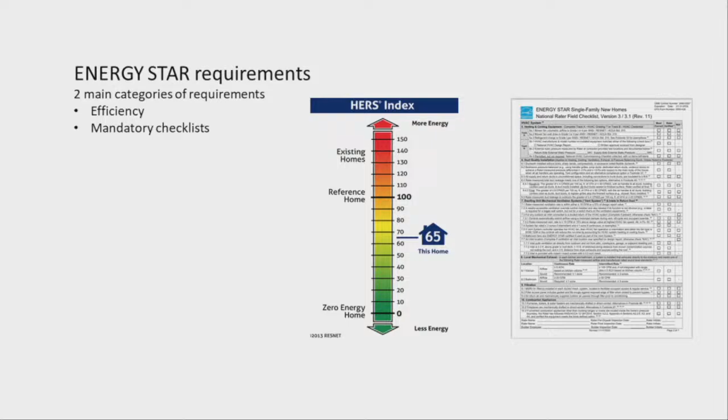The other side represents the overall efficiency of the home, and I coined a term. It's copyrighted. I own it, so don't say it. These are called trade-offable. Okay, so I don't want you using my word. And what that means is Energy Star is less concerned specifically about how you reach the level of efficiency, and just concerned that you get there. Now, certainly there are better and worse ways of achieving a high level of efficiency in a home.

Sometimes I use a stupid example of you could put R70 walls in and an 80% furnace, and maybe that would get you there. It'd be a really dumb way to do it. It might work. I've never tried to model it because it would be really dumb. But that's an extreme example of some flexibility. And actually, yeah, I don't know why you'd try it. It might work. Okay.

I think we've actually kind of already covered this slide. Well, let me say a little bit about it, though. From the outset, Energy Star was designed to be about 15% more efficient than your current code. And that's why there were different versions of it in different states. There are some states, California, Oregon, Washington, Massachusetts, they've always been really progressive in their codes. And so sometimes they get their own special version of Energy Star that's beyond what the rest of the country gets just because their energy codes are so progressive. But by and large, it's designed to be about 15% more efficient.

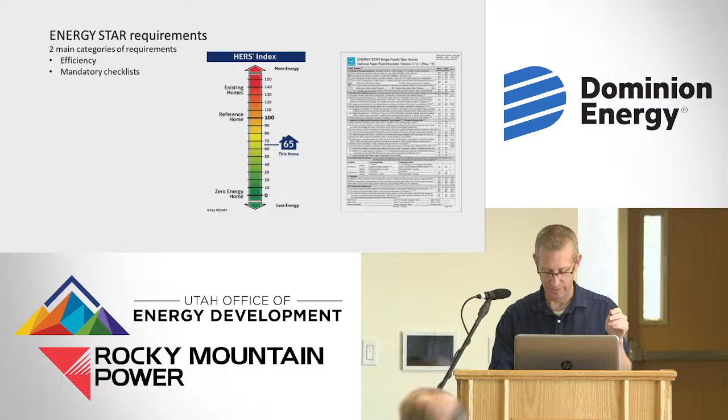Your worst built home's probably in the 70s, 80s. Your best built home is probably in your 40s. 30s is really hard to get. Probably in your 40s is kind of the reasonable range these days. My house is special. It's above 100. Yeah, my house was built in the 1880s, so we're going to give it some slack. But anyway, there are homes out there that go above 100, right here.

Okay, so the lists that come from EPA give you a reference home, and if you build a home to that level, or at least model it to that level, it should return a HERS score that is in the range for being compliant to Energy Star. Okay, Chris, how's this looking? You're making a face. Did I get something wrong? No. Is this the reference for 3.2? Yes, reference for 3.2. Okay.

R60 in the attic, 20 plus 5. What that means is that in your wall, you have R20 between the studs, called cavity insulation, and that plus 5 means that you've put R5 of additional insulation on top of the studs, typically called continuous insulation, and usually that happens these days in this state with rigid foam, those 4x8 sheets of pink or blue foam. So if you see one number plus another number, it's your cavity plus continuous.

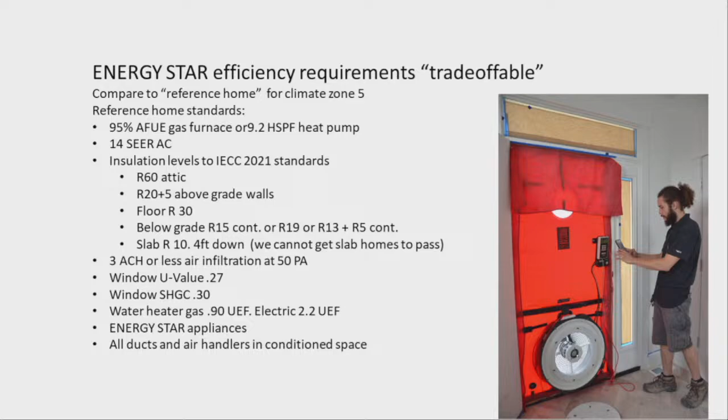If you can cost effectively find things that exceed these values, do it, because as Steve mentioned, some of his stuff is passing just barely. If you can pad your stats a little bit for a reasonable cost, it's always good to have some headroom, so that when it comes down to the final thing, you're not finding out that, oops, I missed it by 1 point. You don't want to do that, because at the efficiency levels we're talking about, even 1 point can be tough to come by.

So the solar heat gain is 0.30. The way I think about this, maybe it's to help me better understand it or to help me better teach it: I think of the window U value as the window's ability to insulate in the wintertime, and the solar heat gain coefficient is the window's ability to insulate in the summertime. It's not quite that simple, but it helps me wrap my head around it, and sometimes people don't always want the science behind it.

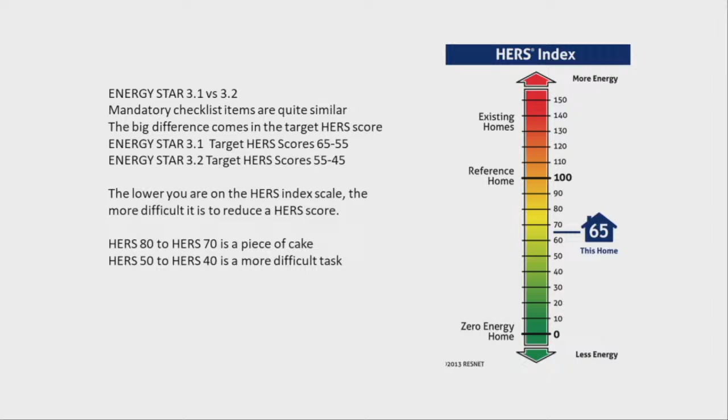And certainly curious what other HERS raters in the room have to say. I just kind of spitballed this. The HERS score needed to achieve Energy Star differs a little bit home to home. It's unique to that home. That's why I keep saying target HERS score. For version 3.1, it's kind of been in the 65 to 55 range. Again, lower is more efficient. Think golf, lower's better. Version 3.2, it dropped about 10, 55 to 45.

And as I've mentioned, it's not linear. Going from 80 to 70, piece of cake. That's taking out your 80% furnace and putting in a 95. You just did it. But going from 50 to 40, if you're at 50, you've already got your 95 furnace and your tankless hot water heater and your upgraded walls. The low-hanging fruit is gone, and now it gets really difficult and expensive.

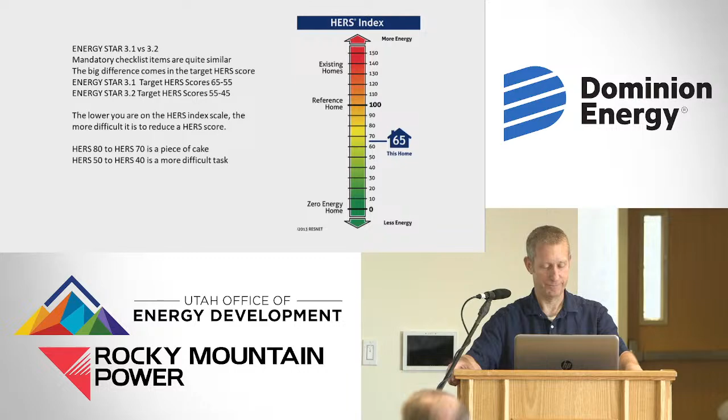So do you guys agree with that? 65 to 55 and then 55 to 45, has that been pretty good? Yeah. So that's about where we're at. Any questions on that?

Back on the SEER rating, is that SEER 1 or SEER 2? Oh, that's a great question. I think it's SEER 1, actually. So Ryan just asked if it's SEER 1 or SEER 2. Ryan is an HVAC contractor, and SEER is seasonal energy efficiency ratio. It is the number that measures how energy efficient an air conditioning system is.

And just to keep things complicated, as long as I've been in this business, there's just been SEER for residential AC as the efficiency metric. And a new one has been introduced. I don't know, was it the federal government, EPA, or DOE? DOE introduced a new one. It's just called SEER 2. And I'm sure they had their reasoning for it. In fact, Ryan, do you want to tell us about SEER 2 real quick?

SEER 1 versus SEER 2 basically is SEER versus SEER 2. Basically, SEER is a laboratory rating. SEER 2 is more real world. Your static pressure is higher. Your ratings are a little bit different, but if you tried to get the old SEER rating actually on a project, you'd never accomplish it.

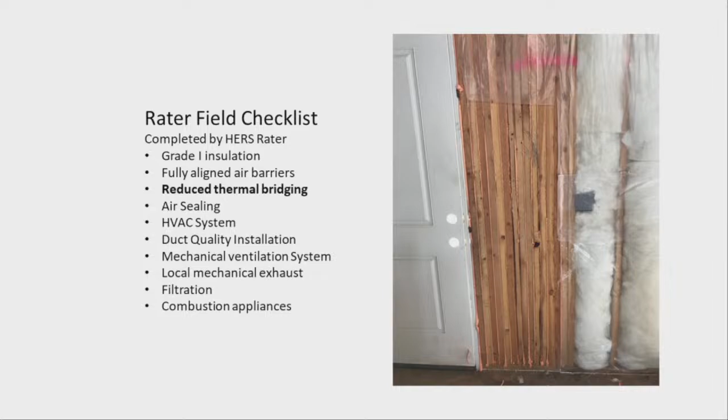Something about our framers seem to think that lumber is free. Mind you, this is a 2-story building. If this was 6 stories, I might get it, but this is 2-story. And that's a perfect example of the opposite of what we're talking about, because what we're talking about is using just the fewest number of studs that is legal and possible.

And typically, if you've got engineers' requirements saying you need to use this much lumber for the structural integrity of the home in a certain place, Energy Star is going to respect that. We're not asking you to. Well, obviously you wouldn't be able to anyway. But if an engineer says that's how many studs you need, fine, that's how many you get to use. But oftentimes it's the framers who are making those decisions and not

the engineers. Now, I've said a good way to reduce excessive framing is to take away people's pneumatic nailers, and they're only going to get the studs that you actually need in there. But you also wouldn't be able to hire a framing crew. So that's the HERS Rater.

I'm trying to decide if we keep going or if we just break. Yeah, what do you think? 12? Let's break. It's noon. Who's hungry? Yeah, I've always said you never want to be the person that's standing between anyone and their lunch. Yeah, but we listen a lot better after. Hopefully there's a lot of turkey there, so everyone's going to be top game after lunch. All right.

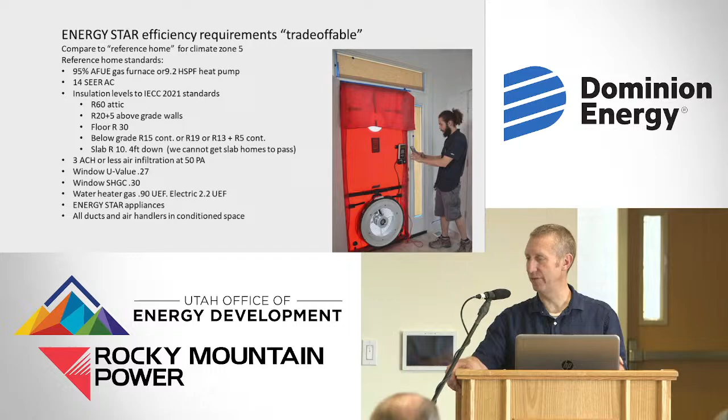One thing I just wanted to touch base on. Here we go. The water heater. I wrote water heater gas, 0.9 UEF, electric 2.2 UEF. And one thing that I've seen a little too often with water heaters specifically is people will switch from gas to electric water heaters as a step to make their building more efficient. It certainly can do that, but it can also go the other direction real fast.

So with gas water heaters, there is a variety of efficiencies that you can get. You can get the standard federal minimum efficiency gas water heater that's got B vent, which is a double wall metal venting that goes out the top and has to go out the roof. It has to be vented vertically. You can step up in efficiency from that and get them that have PVC pipe that is power vented out, and that can be vented out horizontally. That's more efficient because the exhaust gas coming out is cool enough that it doesn't melt the PVC.

Those are sometimes called a one-pipe water heater. At least that's what I've called them. It's got one piece of PVC. It's still drawing the combustion air from the room that it's in. And then you go to a two-pipe where it's bringing in the combustion air from the outside through a piece of PVC and venting out the exhaust air through another piece of PVC. And those both still have tanks. And then typically the most efficient gas is the tankless. So there's a scale, there's a variety.

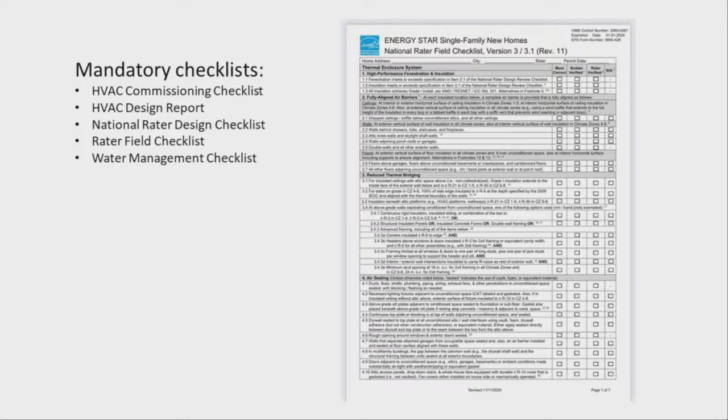It's just expensive. Every home visit costs money. And so the builder is allowed to complete that one themselves. It's a really important checklist, though. I mean, what's the number one cause of failures in homes? Water. Most of the time it's bulk water too. We'll talk about ventilation and vapor and condensation, and that can certainly be problematic, but typically it's bulk water intrusion.

So just because the builder is allowed to fill it out does not mean that the flashings don't need to be done correctly and things like that. I was so neurotic. We actually put pavers in around our chicken coop last year, and I was telling my wife, okay, we've got to be sloping away from the coop, at least a quarter inch per foot, just to make sure we don't have any problems with our chicken coop foundation. So it's important everywhere. Always direct water away from the building, and the builder can take care of that one.

Okay, HVAC design report. So from a 30,000 foot point of view, what Energy Star is asking you to do with regards to HVAC, if we wanted to break it down to its simplest terms, is do it right. But to give a little more detail, design your system with accurate information based on the home plans, and then you're going to derive your loads. It's called a Manual J, and garbage in, garbage out. It's only as good as the information you put into it.

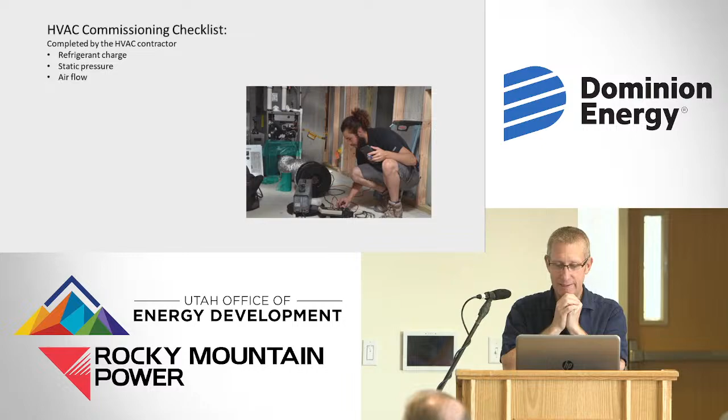Performing a duct leakage test, and we even had him break out, you can see down there in the corner in front of the duct blaster, our theatrical smoke machine. The theatrical smoke actually kind of gums up your equipment a little bit, so you only use that when you really need to. And typically, you only smoke your systems when you're doing show and tell with people. Sometimes it's a recalcitrant HVAC contractor who believes their duct system actually doesn't leak, and you have to show them with smoke.

But what we do is we cover up the registers, and then that black thing is a fan, and we call it the Jiffy Pop tube. We pressurize the duct system to 25 pascals. I think people sometimes think when we're doing a duct test that it's a ridiculous amount of pressure that we're putting in there to induce the leakage. It's really not. The fan's just noisy, so it seems like it. That's 1/10 of an inch of water column, isn't it?

25? Yeah. So, HVAC systems, do you ever get up to an inch of water column, Ryan? No, not in residential. What, half inch though? Ductwork, yeah, no more than half inch. And normally only 0.55 is about max, residentially. So the amount of pressure that we are inducing for this test is actually pressures that are experienced in duct systems during operation. I've been criticized saying it's not fair to tell me my duct system leaks when you're squeezing it so hard. I'm like, actually we're not. We're just making a lot of noise while we squeeze it a little bit.

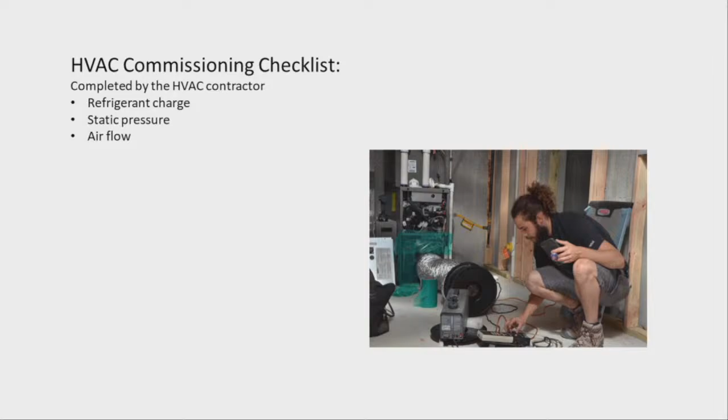The gentleman in the photo's name is Cyrus. I'm sure he's just posing, trying to look really deliberate while he's doing it. But that's a little pressure gauge. It's called a manometer, but it's basically a pressure gauge and kind of a little handheld computer. And so we're measuring the pressure inside the duct system and the pressure outside the duct system. And then that fan is also communicating with the little handheld computer, so that we know how much air is moving through the fan.

And so we just adjust the fan until the pressure inside the duct system is a steady 25 pascals, or about 1/10 of an inch of water column, higher than the pressure outside of the duct system. And then we just look at how much air it takes to maintain that constant pressure differential, and that's how we know how much air is leaking out of that duct system at that pressure.

And this is one of the tests that HERS raters will perform. It is actually part of Utah code to test duct systems if at least part, and definitely if all of that duct system is outside of conditioned space. And typically in Utah, that means if you've got ducts in an attic. If you have a system in an attic, then that automatically means that duct system needs to be tested for code as well.

And what we do is we calculate how many square feet of floor space that system is serving. So it's easy if there's only one system in the house. It's the square footage of the home. And then you're allowed a certain amount of cubic feet per minute per 100 square feet of conditioned floor area. We say percent, but it's not really percent. And it depends on how many returns there are in the system. But that is how a duct leakage test happens.

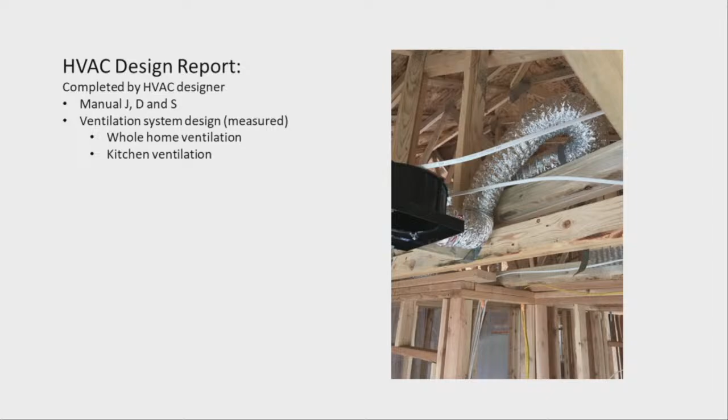So a little quick lesson. Our HVAC guys live and die by this stuff. But there is something called static pressure in a duct, and there's friction when air is moving through a duct, and that friction will cause pressure to build up in it. Sometimes it's nominal, sometimes it's significant, and flexible duct has higher static pressure because it's rough and it's harder for the air to get through it.

And as you could guess, it's harder for air to go around corners than it is to go in a straight line. And so because of that, to help HVAC designers understand how best to design a system, there's something called equivalent length. And so a 90-degree corner, even if it's kind of rounded off, has the same static pressure or equivalent length as like 20 feet of straight duct. So corners really hurt things.

The worst case I've seen is a 90-degree bend or even a T-bend that comes up out of a furnace and then splits off two ways. That might have 120 feet of equivalent length. It's really hard to have a system that works well. And so what happens in those situations is the airflow just goes down and down and down. So this fan is probably a 100 CFM fan, as rated by the manufacturer.

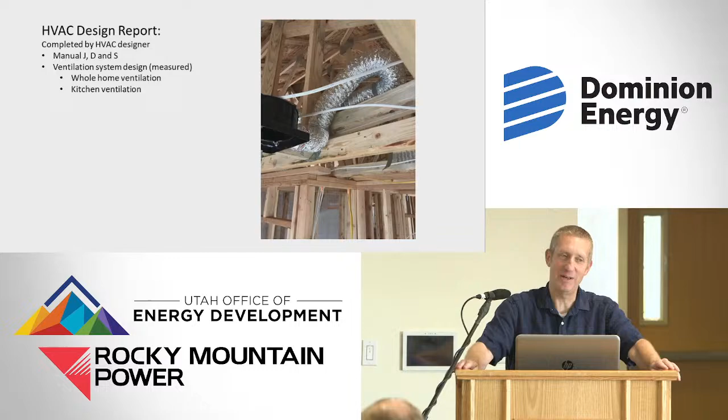Unfortunately, that 100 CFM fan, I didn't test it. I was doing something else there. It's probably moving 20 or 30 CFM, would be my guess. Maybe. Does that pass code? Well, actually, it doesn't depend on the city. We have a state code in Utah. Code now says it doesn't. Flex duct, 4-inch flex can only be used for 5 feet maximum, so it almost has to always be solid pipe. Oh, good. I think this was 6-inch, but I could be wrong.

But whether it passes code or not, to me the big problem is, is this bathroom going to have moisture problems, especially in the wintertime? We're going to get condensation in there. Yeah. Will there be mold, mildew, moisture problems because of that, Steve? And with all that static pressure, it's also really noisy, and they'll never turn it on. Yeah.

So let's talk about ventilation and Energy Star. There are 2 different categories of ventilation that are required for Energy Star. One of them is whole home ventilation, and the other one is kitchen ventilation.

I have spent ridiculous amounts of time trying to explain this to people. And I think I ended up confusing them more than anything else. Am I the only one that does that? Chris just chuckled, so maybe I'm not the only one. Okay.

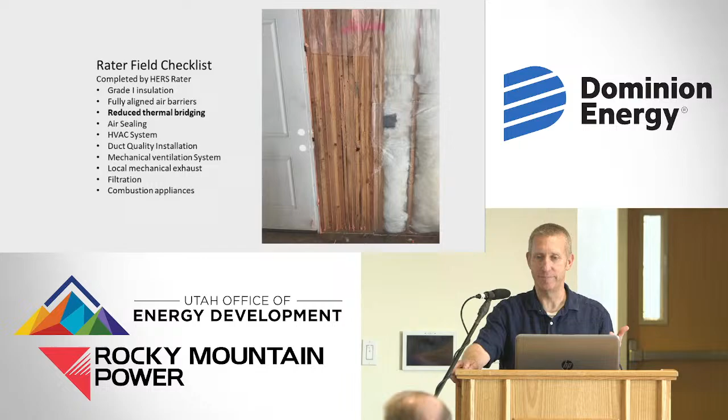And by terrible, think of an oddly shaped stud cavity, whether it's got J boxes in it or it's not the nominal width. And rather than cutting the batt to fit, they just shove it in. And when you do that, in some places it's going to be compacted too much. Other places there's going to be nothing there. The way that's usually referred to in HERS Rater world is gaps, voids, and compressions. And all of those things reduce the functional R value of an install.

Typically, in residential new construction, batts are never installed to a grade 1. It's far more time consuming to do it that way than a grade 2 or a grade 3. It's really difficult. If you want to build Energy Star and you want your life to be good, blow in your insulation. You do get higher R values as well. The standard density batts for a 2x6 stud cavity are R19. You can get high density batts that are R21. Last I've heard, the R21 batt install is now costing more than the blown in. So I don't know why you would ever do them. It costs more and doesn't do as good a job.

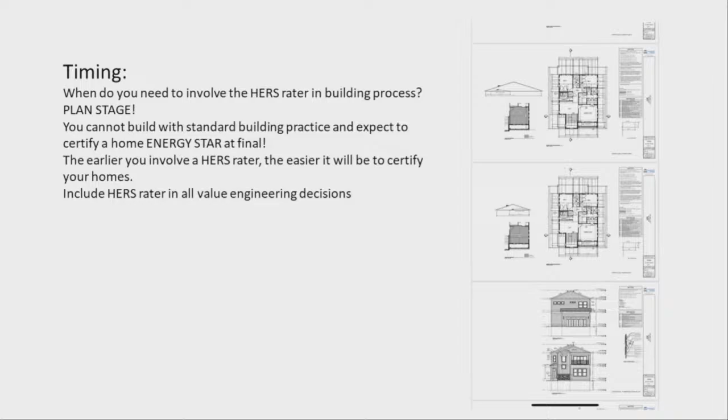So, you're a builder and you want to build Energy Star. How many of the HERS raters in this room have received a phone call from someone who said, can you certify my home as Energy Star? Yeah, of course we can. And they say, well, where are you at in the construction process? We just got C of O last Friday. C of O is certificate of occupancy. That means the home is done. That is not the time to call your HERS rater. So when is the time to call your HERS rater?

Plan stage. So when you've got plans and you've spec'd things out, especially with version 3.2, we've got to model that thing as designed and see where it comes in, because business as usual does not pass Energy Star 3.2 anymore. So you want to include us in the planning stage. Also, do not hold any value engineering meetings without us. It's amazing how we get in trouble. They say, well, you told us it was going to pass. We're like, well, you changed all these things without telling us.

And then we need to be there to see all the insulation installs, and look at air barriers, flashings, all the stuff that's on our checklists. And then we come in at final. We like to do our duct testing at 4-way typically. You don't have to, but that's where we like to do it. And then we come in and do a blower door test at final. And then once we've gathered all the field data, the rest of it's the software work that Chris loves so much.

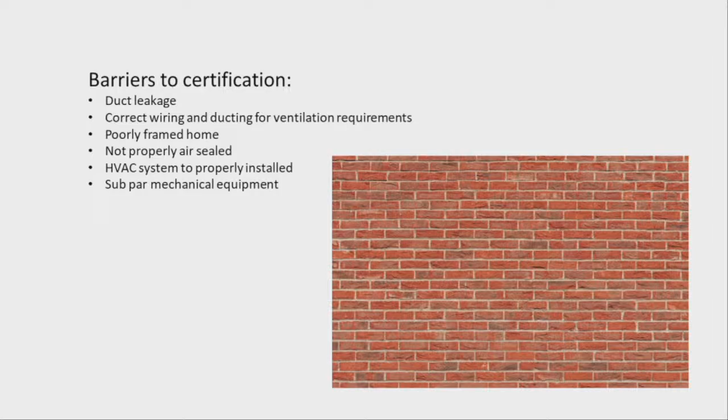Okay, so this slide might be kind of dumb at this point, because it used to just say duct leakage and correct wiring for ventilation. That was in previous versions of Energy Star, because those were the big gotchas. If your ducts are too leaky, you've got to get those fixed. If you've sheetrocked your home and you didn't run the correct wiring or ducting for your ventilation, you're hosed.

But man, with version 3.2, I kept thinking I could just keep extending this list out to be like all the other lists we've been looking at today. And I'll just say you're never going to accidentally certify a home to Energy Star version 3.2. You've got to be deliberate in your insulation, your cladding, your framing, your air sealing. You've got to partner with a great HVAC contractor who cares and is willing to learn and maybe do things differently than they've done in the past. And you've got to be willing to use better efficiency and good quality mechanical equipment, ventilation fans. I feel like this list could go on. So this slide may have been a little dumb because it just kept growing as I thought about it.

All right. So first of all, don't take a picture of this and say, Troy said if you do these things, you're going to pass Energy Star 3.2, because it's just not true. What I'm saying is we have been able to get homes with this spec to pass Energy Star 3.2.

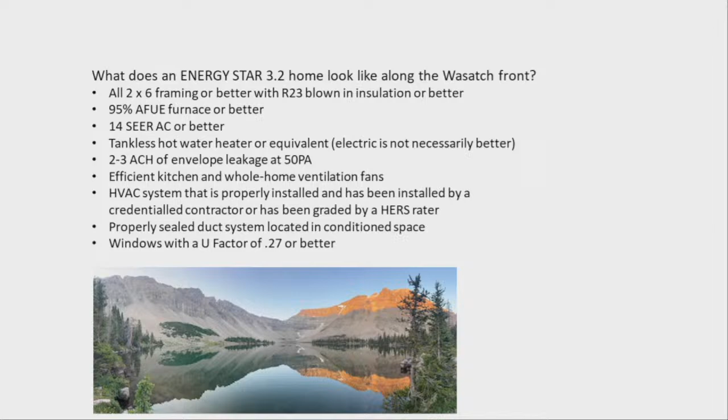And not all of them, but sometimes. Part of it, I put the picture in because that's like Utah mountains. So this is like Utah Wasatch Front, right? So 2x6 framing with R23 blown in. We've been able to get them to pass without having to do R5 rigid exterior. I feel like that might be a non-starter for a lot of people. Can you do it with R19 batts? I doubt it. I don't think you could. So you've got to be blowing in the higher stuff.

95% AFUE furnace or better. 95 is pretty dang high. You know, going from 95 to 96 or 97's probably not going to change anything dramatically, but you can't really go below 95 and have a chance to pass. I didn't put in heat pump HSPF numbers for this, especially because this has been geared more towards single family. There's actually a different version of Energy Star for multifamily that we haven't really talked about today, for the exciting sequel. And heat pumps are far more common in multifamily than single family at this point. So I didn't put a heat pump efficiency in.

14 SEER AC or better. Again, that's federal minimum right now. So nothing heroic about your AC efficiency. It's about the only thing that's not heroic. Tankless hot water heater. You might be able to get them to go with like a 2-pipe storage tank, but tankless is better. And so if electric, it has to be a good heat pump hot water heater, not just a heat pump, because there is a little bit of a range in the heat pump world. It's got to be the top end. So again, electric is not necessarily better in this case.

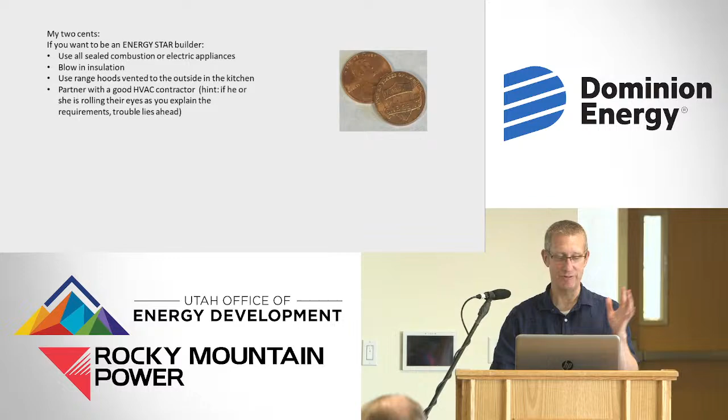Okay. This might be a little outdated. It really is. We've already hit all this. You can't pass without sealed combustion. Range hoods, I think, are the best way to vent kitchens. And maybe the best way to make your life good is partnering with an HVAC contractor. If they roll their eyes just once at anything you tell them, don't walk away from them, run. Because they've got to believe in this stuff as well, or it'll be really hard. So you've got to partner with a good one, even just one that's willing to learn.

Any questions? I actually have one. When you blow in insulation inside of walls using the drape system, are you ending up with more mass in the walls? R19 batt versus blowing, are you getting more mass? Yeah, definitely. There's definitely more mass. The density is definitely higher. It's still fiberglass, but there's definitely more of it.